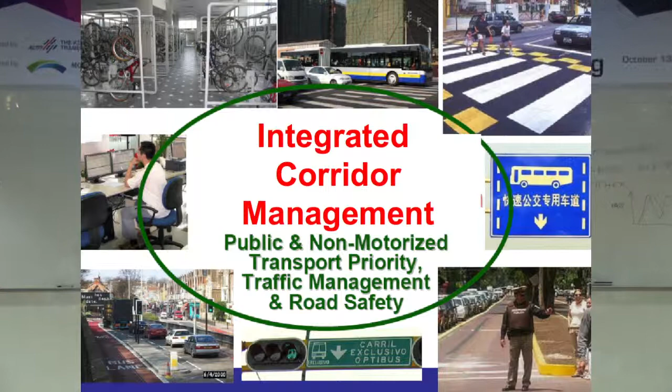Back in 1973, the U.S. had a major highway program building the interstate system. I'm sure you've heard of that, 41,000 miles, 70,000 kilometers of major highways all over the country.

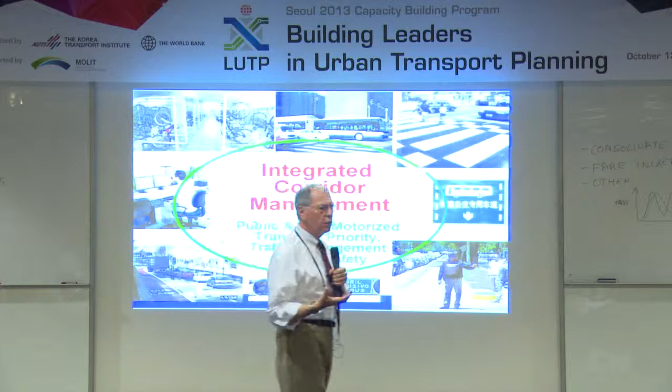And people were noticing that even in places with a lot of highway construction, there was still a lot of congestion. So people began to think maybe we should spend some money on better managing what we had. And our parliament passed a law that created a special fund for what was called Transportation Systems Management.

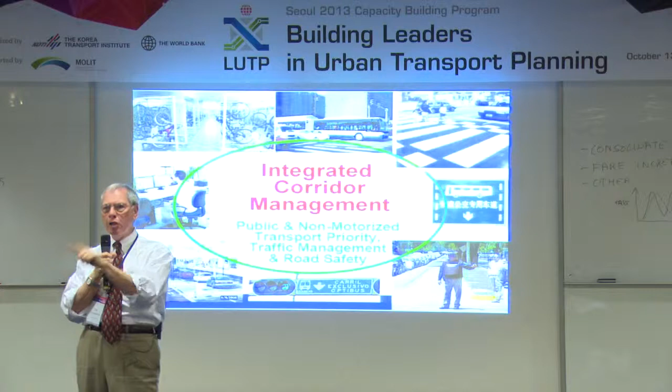And we have a lot of acronyms in the United States, we play around with letters. Transportation Systems Management was funded to the tune of billions of dollars. But after the billions of dollars, that program's nickname was T, Transportation, S, Systems Management, TSM. Nobody noticed anything. No difference.

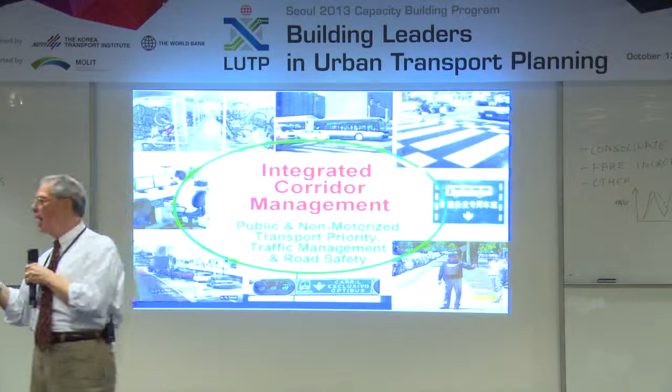Still gridlock, still poor public transport. So TSM began to be known as too small to matter. Billions of dollars and nobody knew where the money went.

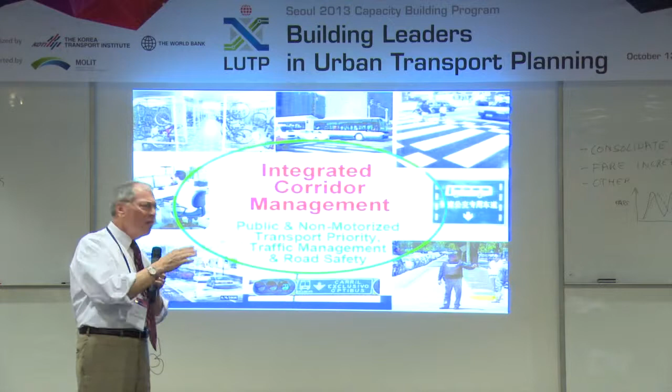Too small to matter. At the same time, where I worked, in the Public Transport Authority, we were spending a lot of money on bus lanes, busways, all over the US. And again, people noticed that yes, they moved the buses a little faster, but most people still found public transport to be inconvenient, unsafe, insecure.

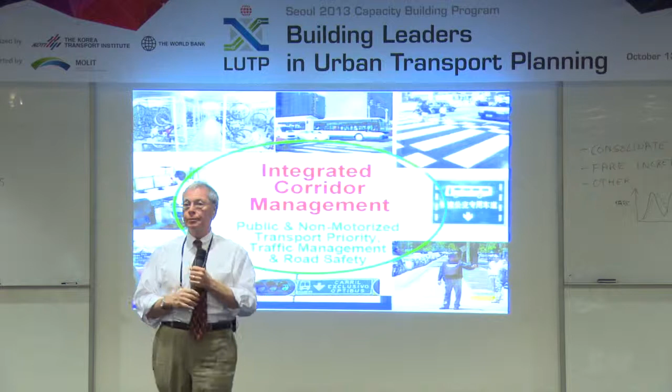And we heard a little bit about some of those reasons in the transfer presentation yesterday, this notion of integration. So that was the genesis of this thing called integrated corridor management. The idea that we would combine public transport and traffic management into one package. We don't just do public transport, we don't just do systems management, we combine them.

This may be a little different than what you have. Okay, so we combine them in one package, and we're going to see why we combine them in a little bit.

And we do it in a corridor or a small area. The north corridor of Karachi, the west corridor of Delhi, or a sub-area, Old Delhi, or the eastern part of Nairobi. We don't do it all over. We focus on one place. So that's essentially what it is.

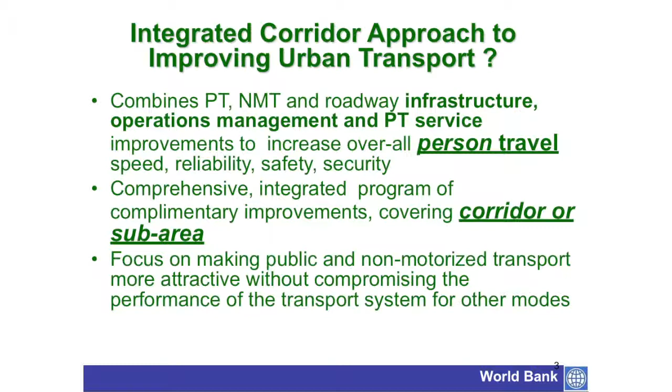But the important point is we focus on people-moving performance, not cars. And we also focus on moving goods, trucks, better as well. So people and goods, not cars. And we do it through a variety of techniques. We're going to learn about that.

Now, why is it so important? No matter what city I've worked in, and I've worked in a lot, there are streets, even in New York, even in our town, Washington, and for sure in places like Mumbai, Delhi, Kampala, etc., where most of the people moving on that street are either walking, in bicycles, or in public transport of some kind.

Whether it's a metro, a bus, a minibus, a taxi, a danfo, or people walking and biking. And yet, when it comes to how we use road space, that road space is primarily devoted to the couple of percent of people who are rich enough to afford cars. So even where we have the money for the road space, we don't give the road space to the largest benefit that we can. So we need to recognize that fact and maybe start using that road space differently.

And the primary reason for that is most mayors, most governors, most commissioners, party chairmen, whatever the leaders are, usually think about one or two solutions. Whatever the transport problem is, they think there's two solutions, just two. What are those solutions? What do they usually think? No. More roadway capacity or a metro, right?

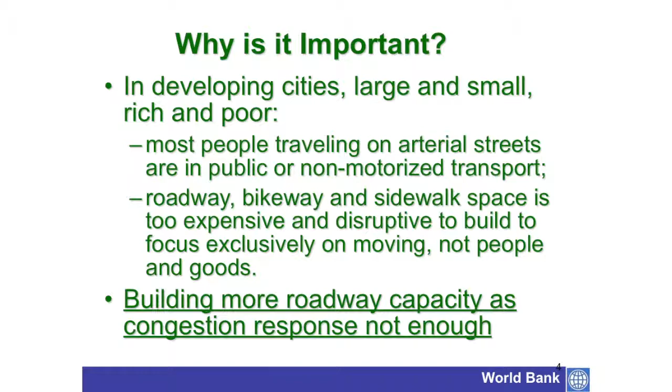The tough part is the stuff that's in between, that if you don't do it, the roadway capacity or the metro aren't going to work as well as they can.

Right. Now, when we spoke to the traffic police and to the people in Delhi, excuse me, I have Delhi on my mind, in Beijing, why is it that you can't do something to make the buses work better on Ring Road 2? They said, oh, it'll screw up traffic. Well, most of the people there are in these buses, maybe 25 times as many people as there are in the cars. But we can't do anything for the buses.

So there's two things. Ring Road 2, big road, lots of money, and by the way, this road was built on the walls of Beijing that had been built by the Mongols in the 12th century. So it destroyed the cultural heritage of Beijing and really didn't solve a problem.

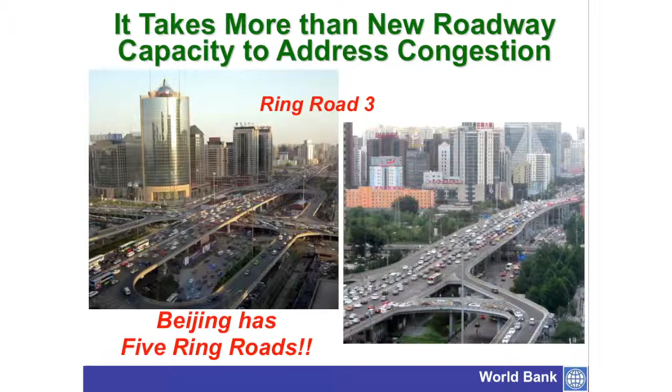So one of the things about integrated corridor management is we are willing to maybe inconvenience the few people that are using cars, not to hurt them, to inconvenience them so that the majority of people can do better. The other thing is we are about moving people. And one of the objectives in moving people is not only to reduce congestion, but also to improve safety and security for them. At the end of the day, we hope we're better off in all directions.

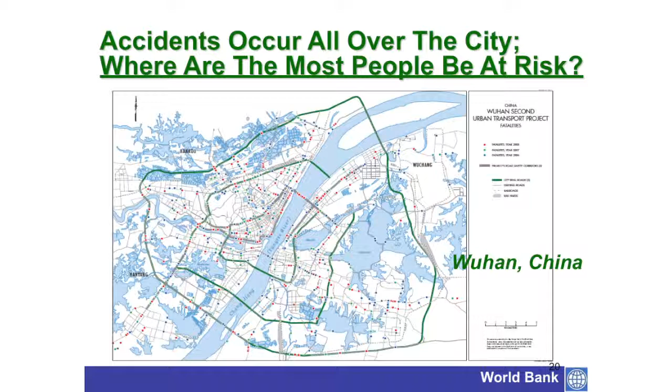And this is Wuhan, where we have big safety problems in China. These are pictures of accident locations. You see they're scattered all over, but when we looked at it on a corridor basis, it just jumped off the page. These blue corridors here are where we have focused our integrated corridor management activities, based on looking at the summation of problems corridor by corridor on safety and also ridership. Very high probability of success here. This is my favorite corridor, because it was a very wide roadway, poorly designed and poorly working, and no merchants, no parking on the sidewalk. Very easy to make improvements. So that's where we elected to start the process.

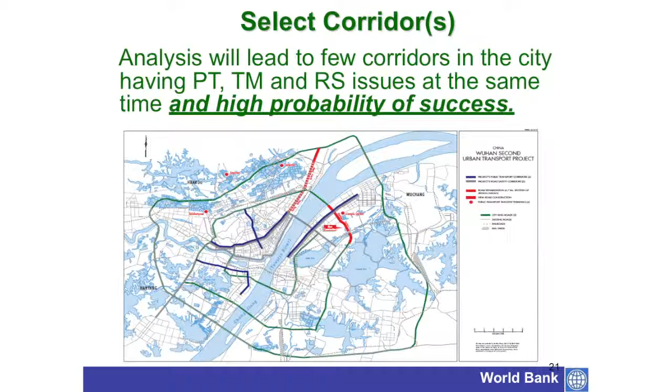Okay, very important on public transport. I mentioned there's a whole bunch of problems, but fundamentally we want to make sure we're not losing time. So we have to do a very in-depth time study. One of my favorite things to look at is the fact that most time spent using public transport is spent getting from it, getting to it, and waiting for it. It's not just time spent moving. And if I'm on the bus or the train, the time that the bus or the train is stopped at a station is very important. There's a measure that we use in planning rail systems in metros. It's called dwell time at stations.

In Washington, this is an aside, but I'll give you an illustration of that. The system was designed in Washington to be fully automated. You don't need drivers for the Washington Metro. But in order to keep the drivers awake, or off drugs maybe, they configured the cars so a driver had to go from one side of the driver cab to the other to open and close the doors. Okay? Open and close the doors.

And that's why when you take the metro in Washington, you'll find that you'll pull into a station, the computer will stop the trains, and it could be 10 or 15 seconds before the doors open. Now you'd say, well, what's 10 or 15 seconds? And another 10 seconds after they close before the train starts moving. So that's 15, 20 seconds.

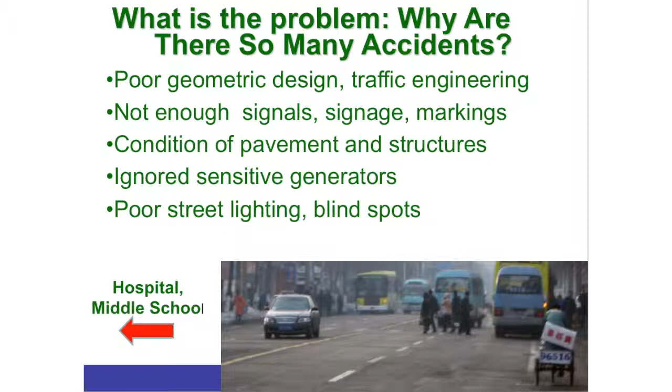We have to look over the whole corridor, because the speeds are really corridor based. We need to calm things down in the corridor if we have a big accident problem. Now, in these TSM, too small to matter studies that my office was involved in, we never looked at pedestrians.

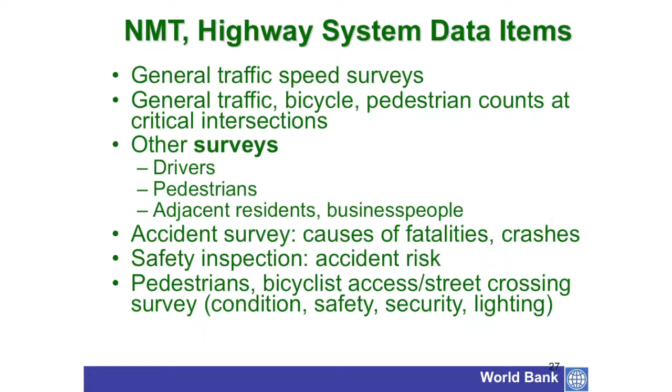If somebody said, we need to do a better job of moving pedestrians to and from our metro stations, to and from our bus stops, the traffic engineers would have looked at me like I was nuts. You want to collect data on who? What? Pedestrians. Who are they? So we have to do that. We have to understand their needs also.

And as Ajay and OP both said, it's not enough to worry about the symptoms of the sickness. We need to focus on the causal factors. Okay, very important. Now we have an understanding of why we have problems, segment by segment, intersection by intersection, stop by stop, station by station. Now, what are the strategies? Well, first, a very good starting point in public transport is the service plan.

Too many buses trying to crowd into one place? Are we collecting fares efficiently? Are the routes going where they need to go? Are we forcing buses to take left turns on streets that don't have left turn signals, as a case in point? So we worry about fare collection, we worry about the operating and service plans, and we try to manage the system better.

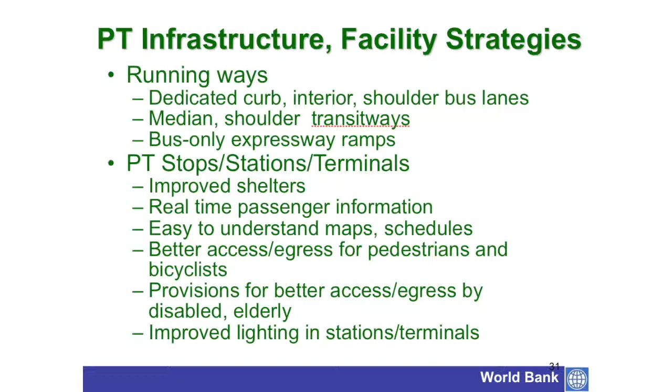There are infrastructure changes that we need to consider, right? And yes, busways, median busways, curb lanes. Sometimes maybe we need to have special lanes on the shoulder of highways for buses. We need to worry about station stops and terminals. If we have a situation where people have to wait on the highway in the rain or in the hot sun, maybe that's not going to make public transportation a very desirable place to be. And then here's some illustrations of bus lanes.

Access, very important. Most of what prevents people from using public transport is the difficulty, particularly for women, of getting into and from it. We find in a lot of African cities where motos, motorcycle taxis, are very popular, and also to a degree in South Asia where three-wheelers are, women don't like to walk in the mud. Guys, like our sons in particular, my son, when he was 10 years old, not only did he like walking in the mud, he wanted to walk in the mud. But if you have a working woman on the way to work, the odds are walking in the middle of a dirt road to get to the bus stop's not going to be such a smart idea.

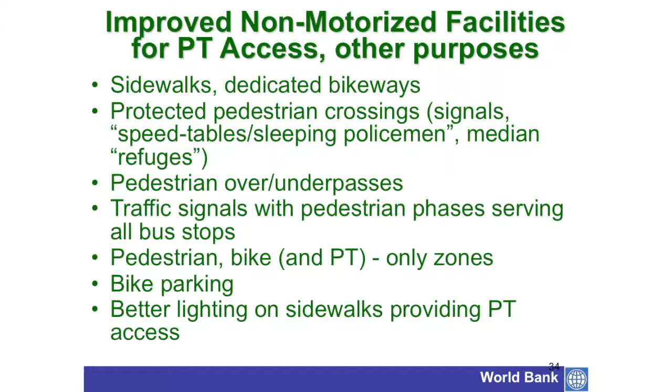And I remembered back in 2007 going to speak to one of the big babus, if you'll pardon the expression, the big shot, high official at the bank that controlled a lot of money, about what kind of activities we were going to do with this new program. What kind of things were we going to support? And Fanke and I said, well, street lighting and sidewalks. And he said, this is a quote, what does that have to do with public transportation? Okay, end of story.

So, okay, bike parking. What are the speed tables? Pardon? Speed tables. Those are the bumps that slow people up, particularly around schools, particularly around bus stops. There's a lot of different words for them. Traffic humps, sleeping policemen. That's what that is. Anyway, bike parking. One of the things that a lot of people that have put bike parking at metros, at light rail lines, at BRT stations, and bus stops have found is you can never have enough.

You can never have enough parking. Why? Because the number of people that can walk, even if you had a good sidewalk system and street lights, is obviously always going to be smaller than the number that can ride a bike almost anywhere.

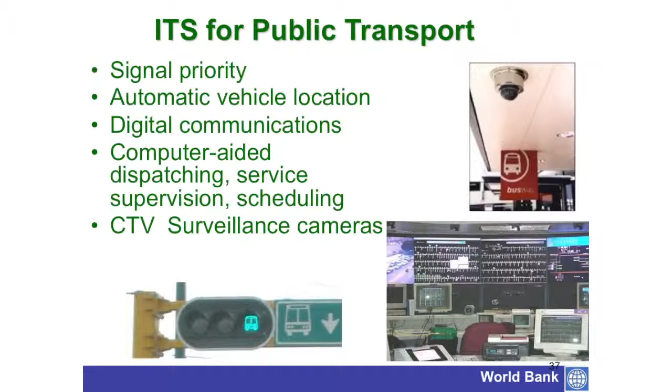All right? So protection, ITS is very fancy. There's a million different things you can do with that, from giving priority to buses to passenger information.

Now traffic management, and you should all be familiar with that list of strategies. They include, number one, parking. If you think about how much you spend to build highway capacity and then give it away to someone parking on it or selling toothbrushes and underwear, it's remarkable. But you can't just say don't park there. You obviously have to have a way of accommodating goods delivery and people that actually need to park. So there's a two-way strategy, managing parking and providing it in some way.

Other things you can do: turn prohibitions, speed restrictions. People should not be going fast in residential neighborhoods where children are playing in the street. Access control. We showed a picture in Manila of this 16-lane wide street where people can park on the road to go get a sandwich. Not a good idea. And then obviously there's some other things you can do.

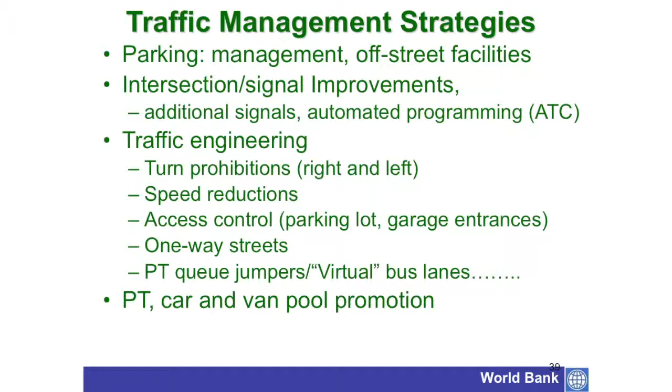Something we're doing a lot in China now is what can we do with big businesses, like the technology companies in India for an example, and now in China the big manufacturers, to get more of their people to use company buses or to carpool with other people. So those are some traffic management strategies.

These are, two of these are from New York, and we see the colored lanes. New York has a law: every bus is equipped with a camera. If you are caught in a bus lane or parked in a bus stop, you automatically get a fine, and you can't argue your way out of it. You may not pay the fine, but then you can't register the car again.

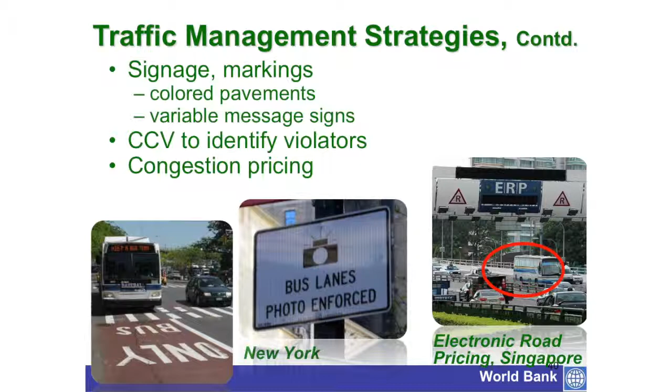Okay, here of course is the famous congestion pricing. And if this was Singapore, they would tell you that they don't have bus lanes on their expressways. And the reason they say, even though they have a lot of buses, that they don't need bus lanes, is because thanks to electronic road pricing, their expressways operate very well, at very high speed all the time.

Interesting story here. When the first BRT line in Mexico City was being built - and this BRT line, by the way, now is almost exclusively 24-meter-long buses and has 800,000 daily riders - there were discussions with the traffic engineers about eliminating left turns because the signals were taking too long and slowing everybody up. The traffic engineers said absolutely not, otherwise people will travel all over the place and force more traffic because they'll be avoiding it, or there will be problems enforcing it.

So the BRT engineer said, well, can we get no left turns during construction? And the traffic engineer said, yes, only during construction. They never took the signs down. So it seems to be working.

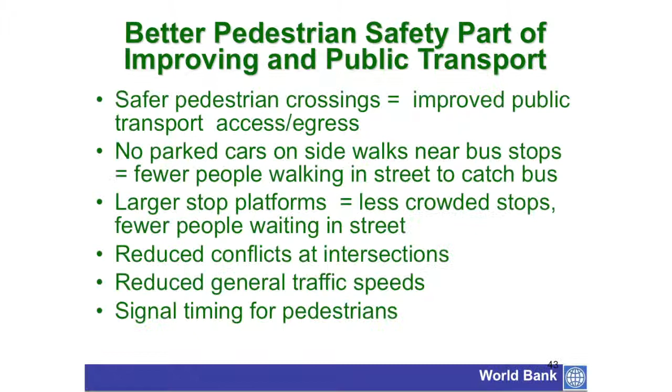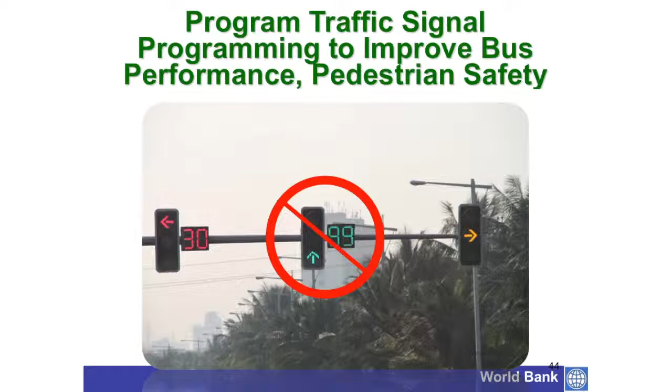Right, we talk about what's the problem. So a very simple thing to reduce accidents with children here: number one, pedestrian phase, and number two, reduce the cycle length. Parking management - can't say enough about it, but remember, you can't just eliminate it on the street, you have to do something to provide alternatives. And then, of course, enforce the rules. This applies to parking and everything else.

All right, once we come up with some feasible, potentially good ideas we think will work, put them all together and then evaluate - and again, evaluate them in terms of people time, people accidents, severity, not vehicles. All right, what cities have used this approach? The number is huge - more and more they're taking an integrated corridor approach. What's the experience been? London did this in about 40 corridors and doubled their bus ridership in 10 years.